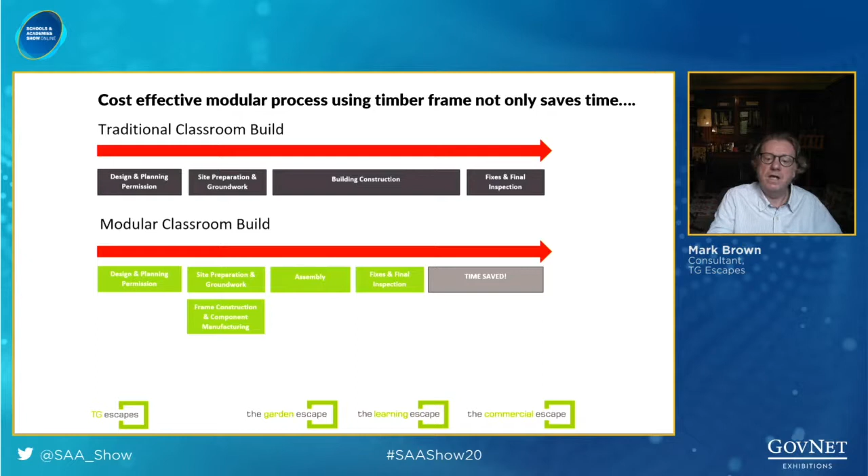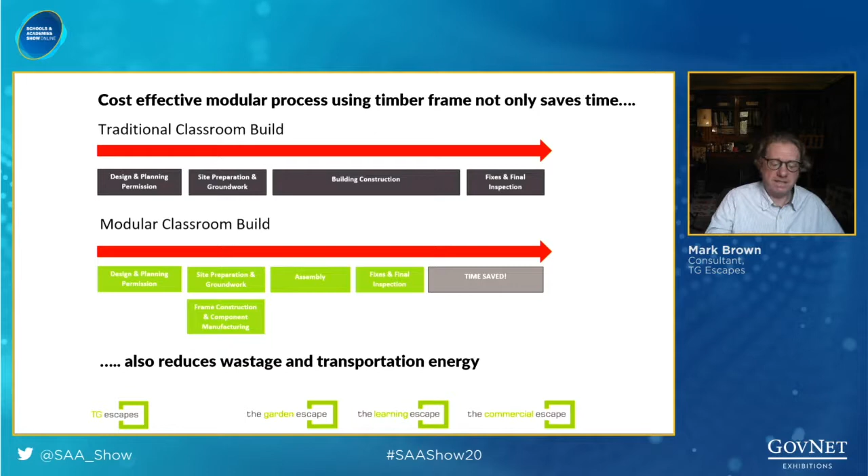Not only is it saving time, but it also reduces wastage and transportation energy, because you can transport exactly what you need to site. You can keep things safe in the factory before you need it, and you've got less weight with timber frame to be transported around the roads.

So we're big fans of timber, and we think that timber really needs to be rediscovered as a modern method of construction. That's because it's the only material grown for construction that is truly sustainable. And with the certification that's available, 97% of all timber in Europe is registered under FSC and PEFC schemes. Timber uses far less energy to harvest and manufacture than alternative building materials.

And it's a carbon sink, so it captures carbon, releases oxygen, and improves air quality over its 60-year life cycle. It weighs 20% of the weight of concrete and 6% of steel, and it looks and feels much warmer. So it brings with it a lot of benefits, and that has some real implications in education settings, as I'll come on to talk about.

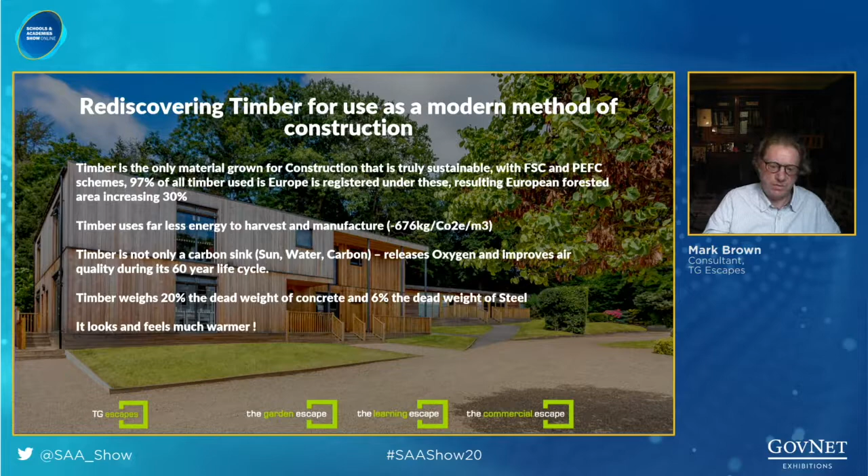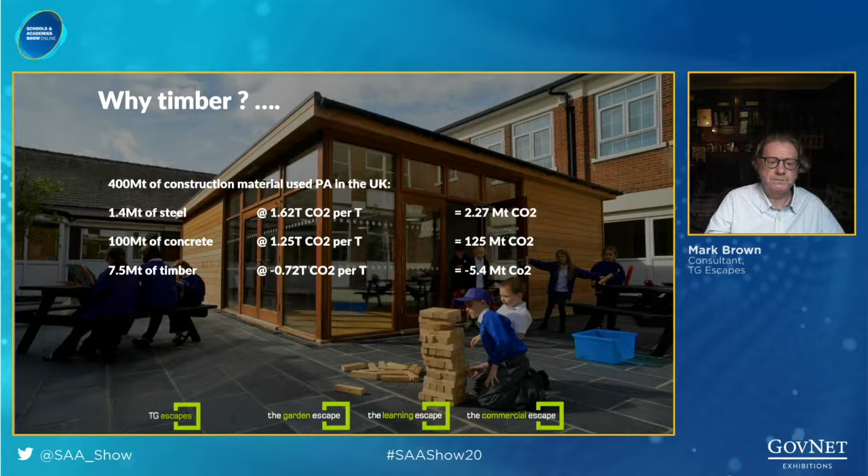And when you look at the CO2 produced by steel, concrete, and timber, you can see that timber is, by a long way, much more efficient and less environmentally damaging than either concrete or steel. It actually locks up CO2, so it's a carbon sink. And it's the oldest building material known to mankind.

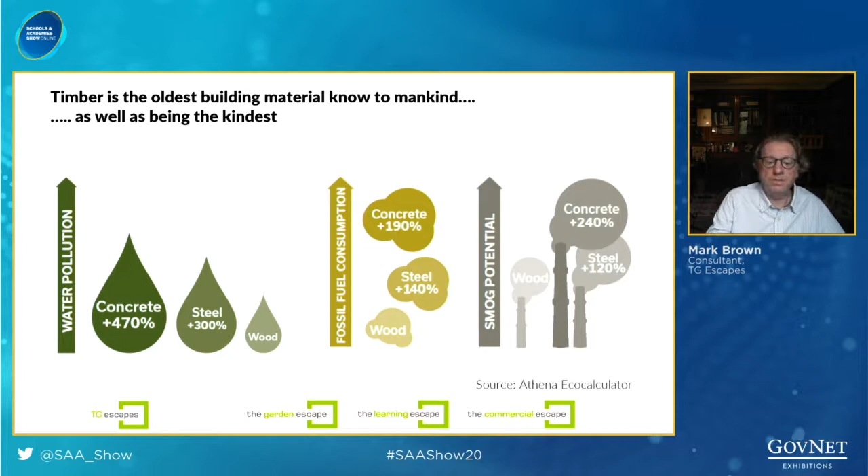People have been building with timber since construction began, but it's also the kindest. It's far less polluting to water than concrete or steel, with less fossil fuel consumption and less smog being produced, according to the Athena Eco Calculator. So the first thing is that timber as a construction material should be considered today, because it's much more environmentally friendly than alternatives.

So how can these types of buildings help you adapt for current and future needs in your education setting? With the need for more space in education, we think these standalone buildings can act something like a safety valve. They can provide additional teaching space. They can provide space for other purposes to free up perhaps space in the main building.

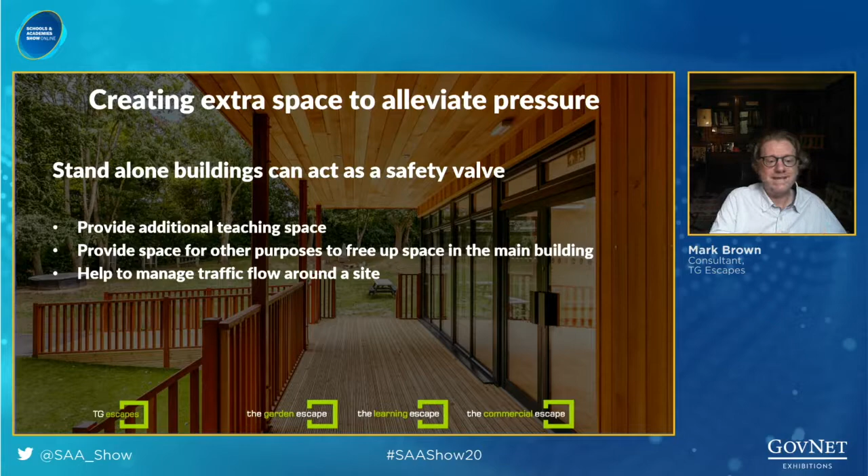And by putting these standalone buildings in particular spaces on your site, you can help manage traffic flow around a site. So you can create different flows around the whole education setting.

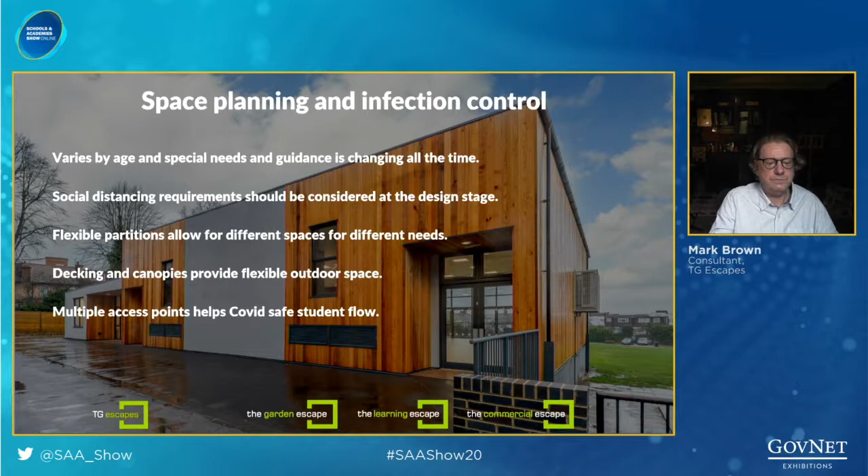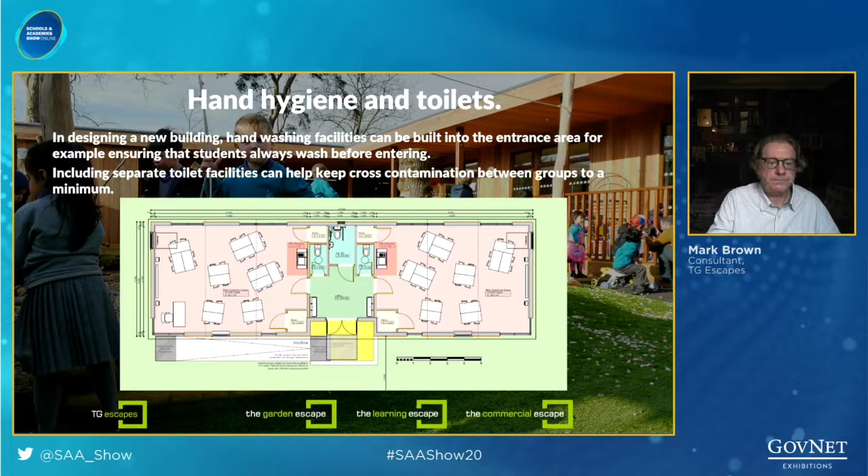And you can think about hand hygiene toilets, so you can build hand washing facilities, hand hygiene facilities into a lobby area. You can have separate toilets designed into the classroom spaces to prevent cross-contamination. You can future-proof by thinking about cleanliness, so you can finish interiors with easy-to-clean materials such as white rock and vinyl floors. Air circulation is incredibly important, so adaptive ventilation provides really good air quality and could be fitted with hygienic filters.

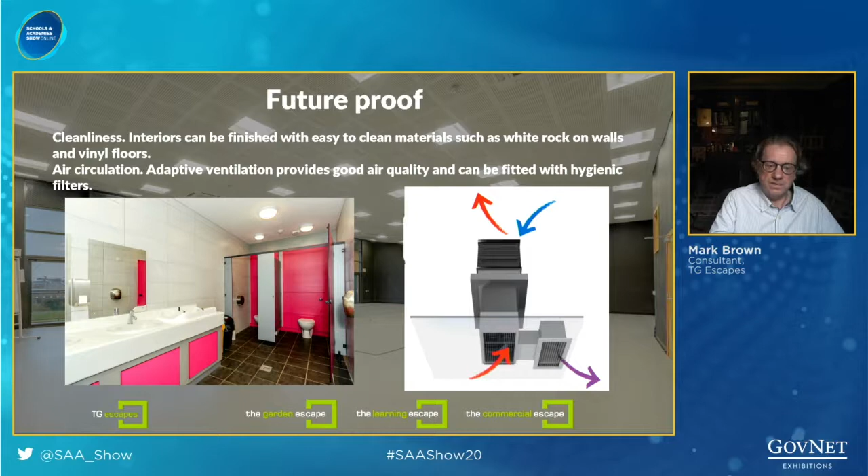So if you've got a need for extra space, the question is, what solution is right for your school? Should you consider traditional builds versus a modular build? Should you think about volumetric? Should you think about the timber system? These are the comparisons that anybody looking at additional space needs to consider.

So some of the benefits that we find that timber provide: we think that timber has a great benefit to educational outcomes and well-being. It can create environments that increase people's willingness to learn and improve results and the aspirations of pupils. And it can have a long-term positive impact on the health of pupils and teachers, reducing burnout. And I'm going to explain what we've found about that.

So we all know that a well-designed space helps us feel great. We know that when you're in a good space, it affects how you feel and how you perform. So when you have a building which is designed to blend with its surroundings, following the principles of biophilic design, which are incorporating natural elements, providing easy access to the outdoors, using materials and textures that reflect those in nature, maximizing the penetration and exposure to natural light, providing a healthy level of interior air quality, and providing views of the natural world outside, the buildings feel very different from a traditional build.

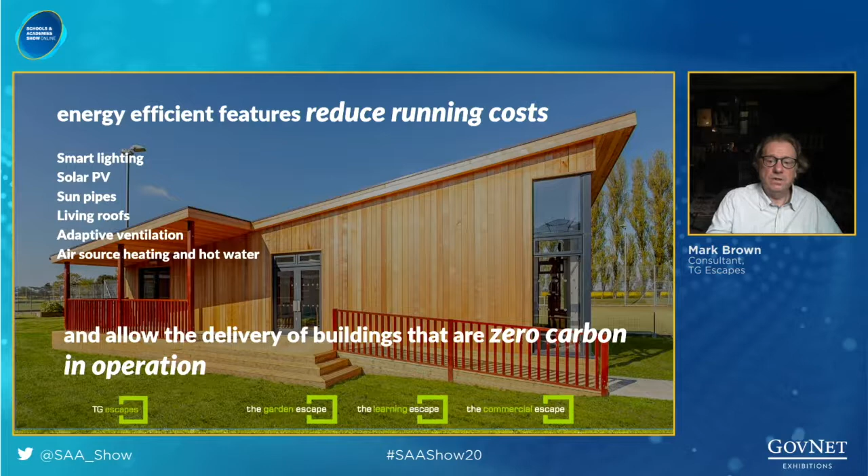The use of smart lighting, solar PV, sun pipes, living roofs, which helps with water runoff, adaptive ventilation, air source heating and hot water. This allows these buildings to be designed to be net zero in operation. So when thinking about a building, it's going to be increasingly important, especially with energy taxes coming up at some time in the future, thinking about a building that's going to be energy efficient to run and hopefully be net zero in the way that it's used.

And when you look at how energy is used across the life of a commercial building, what you see is that the actual energy used in construction is a very significant part in the early years. But of course, over the course of a lifetime, the cost of lighting and hot water and heating and cooling become a much more significant part of the overall lifetime energy cost.

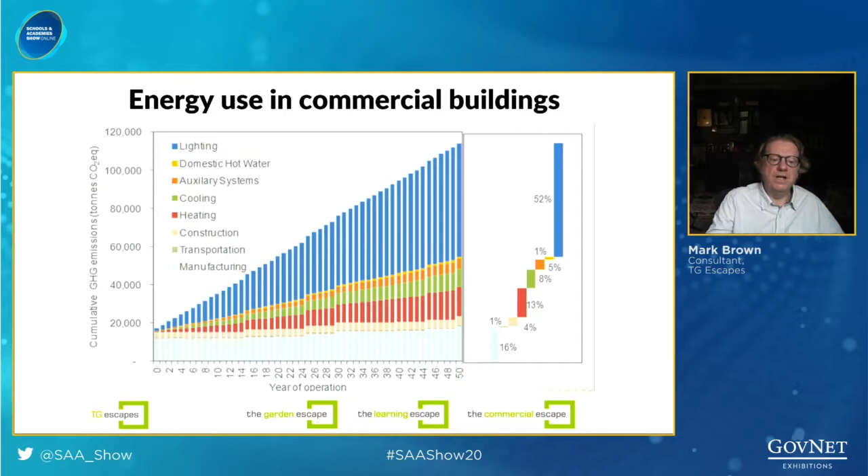So research that was conducted by Passivhaus Trust and Ruth Butler Architects demonstrated that by investing perhaps an additional 20% in the initial design and construction of a building, you can reduce operational costs by as much as 50%. So a 20% investment in design and construction can reduce your lifetime operational costs by as much as 50%.

So again, coming back to our research, both children and staff have really enjoyed working in this lovely new classroom with easy access to the outdoors for play. A welcome bonus is that we've saved significantly on energy costs. The clever features of our building have greatly reduced our energy bills and are easy to take care of. We're able to use elements of the eco-friendly design to teach our children about environmental citizenship.

So to sum up, these types of buildings using a systematic modular timber frame system can be delivered quickly. The smaller buildings, we can be on site in as little as 6 weeks. They can make a big difference to an educational setting because they can provide different types of spaces that feel very different for students and staff, enhance educational outcomes, enhance their well-being.